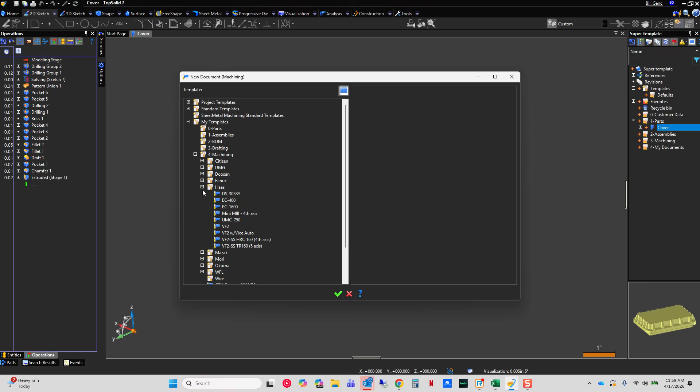I'm going to set my part to machining, and here I'm going to choose one of my templates, and I'm just going to go to my one called my Haas VF2 w/Vice Auto. And watch what happens when I click OK. It's not magic. I didn't do anything special here. Well, I did a little something special. And that special was something taught to me by my buddy Gaton in Europe a few weeks back.

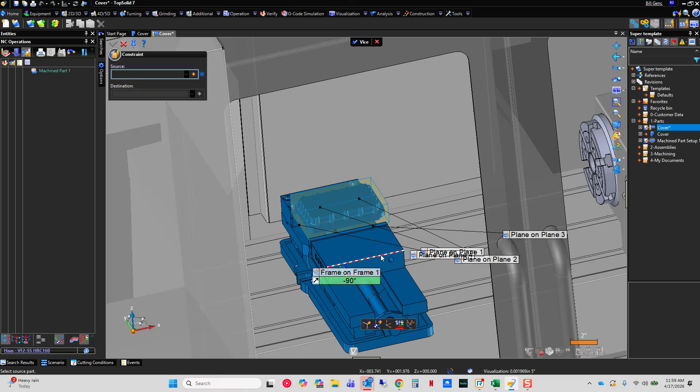So here, I taught TopSolid how I like to position my part, what my default stocks are, and therefore it's going directly into my vise, it's positioned correctly, and I can get straight to machining, wasting no extra clicks of the mouse. The trick is, how did we do it? So that's what I'm going to show you here today. So I'm going to close out of this without saving. I'm going to get rid of this guy here. And we're just going to talk about the steps it takes to do this.

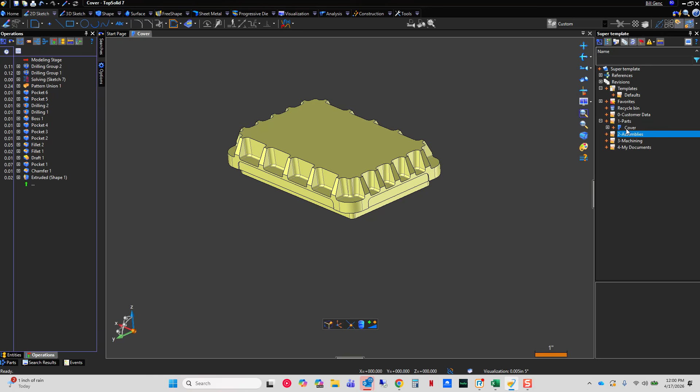So I have my part. I'm going to send this part into a machined part setup document. Blank template for now. I'm just going to accept my default values here. It can be whatever stock you want. Okay. Now, here's the trick. Start by going over here in your operations manager, right-clicking on the NC part management that you've just created, go down to others and choose create positioning planes.

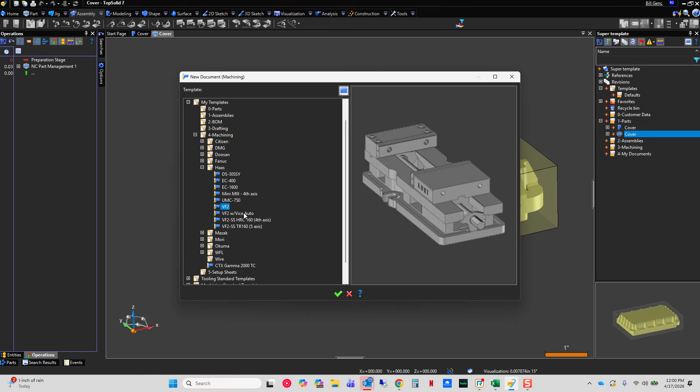Okay, I'm going to save my work. From there, I'm going to go to machining and I'm going to choose whatever template I want. I'm going to choose the same VF2 just without the automation in it. I'm going to green check this and I'm going to choose the positioning group I want to put it in. Positioning 1 is always my vise in my case. And now here is the trick. So instead of just selecting faces here, what you're going to do is go to the drop-down menu, and here you see those positioning planes that were auto-created for you about your MPS file.

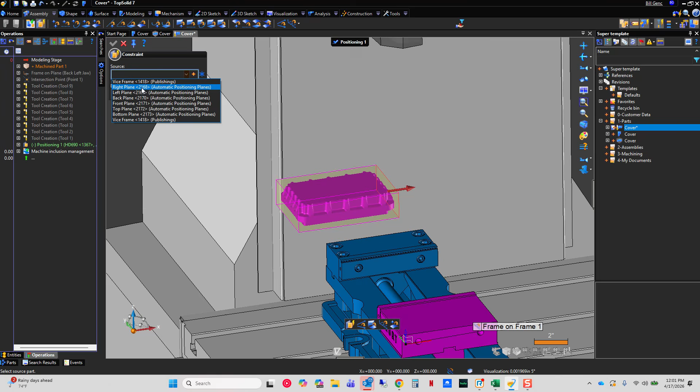So here I want to find that top plane right there, and I want to position it on the jaws of my vise right there. And right off the bat, I'm going to flip that over. Cool. And I'm going to continue this. I'm going to go look for the back plane right there, to the fixed jaw of my vise right there, and I'm going to repeat this. We want the left plane, or right plane in this case, because we flipped the part over, I think. Yep, there we go. Right there.

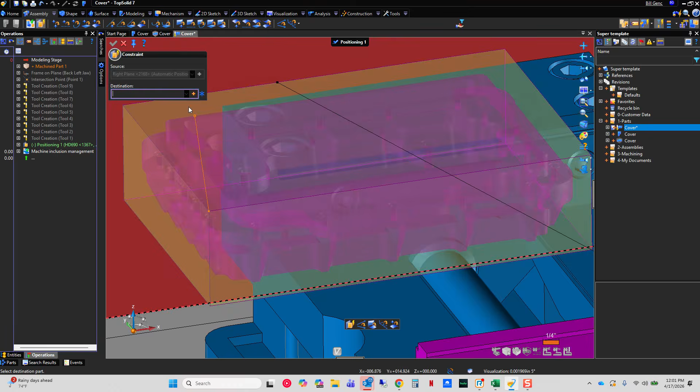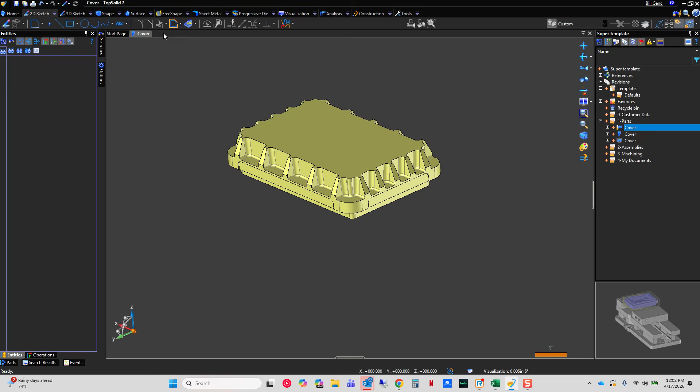And then finally, we're going to take the front plane to that guy. So now we're fully constrained. We're going to validate our positioning, hit save. Okay? Now, from here, we are going to close, close, close. I'm going to take my machined part setup document and my machine, and I'm going to move it into my templates. It could be in your company templates, it could be in your project templates, it could be wherever you store your templates.

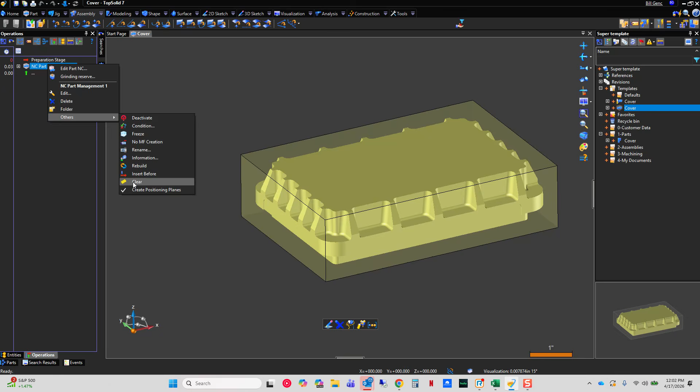Once it's in a templates location, I'm going to go open my machine part setup document, go to the history tree, right-click, come down to Others, and choose Clear. And what that does is that clears out the reference to my original part file, but it keeps everything else. So now you've defined a super template. Okay? Like that. I'm also going to come here, and I think I can delete this now as well. Let's find out. Nope, not yet. I got to purge this first.

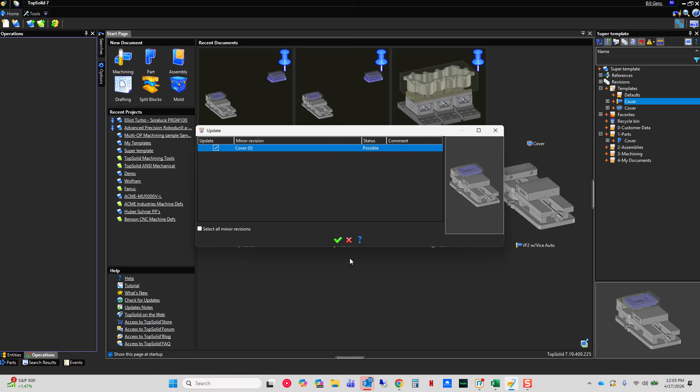So usually you can do it at the root level, you can do it at the part level, whatever. But I'm going to go here to deletion, purge project, perfect. Good, good, purge complete. And now we can come down here and I can delete this. And I'm holding shift to delete. Be careful when doing that because it's a permanent delete. Okay? So now that part is no longer referenced to those.

And you can call this whatever you want. So I'm going to call this Z minus position auto. Okay? You call it VF2, whatever. Okay? And this is just my MPS. Why not? Okay. Let's update. Green check. Perfect. Now, here's how it's going to work. Let's go ahead and import a different part.

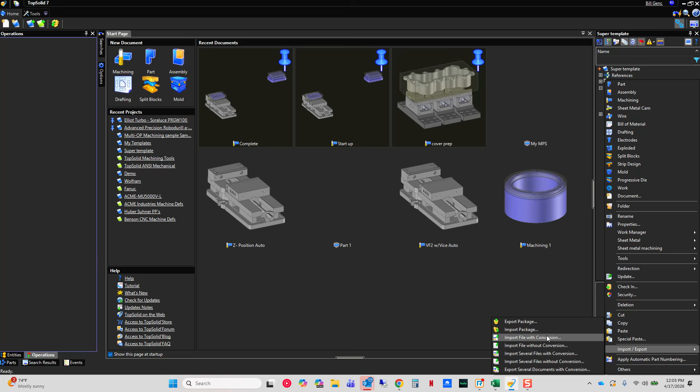So I'm going to go to Import File with Conversion. We'll go grab a part. It'll be a good time. I'm just going to go grab my basic part. That's great. And I'm importing to show you it doesn't matter. It doesn't have to be a TopSolid design part.

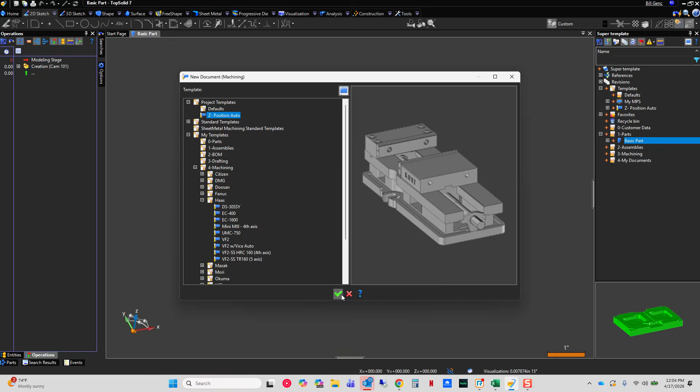And here, we're going to send this straight to machining. And when I do so, I'm going to look to my local projects, my Z-position that we just created. And this is going to come in with the part flipped over so we can machine the backside first, validate our positioning. We're ready to machine with TopSolid.

Hope you find this trick useful and you deploy it right away.